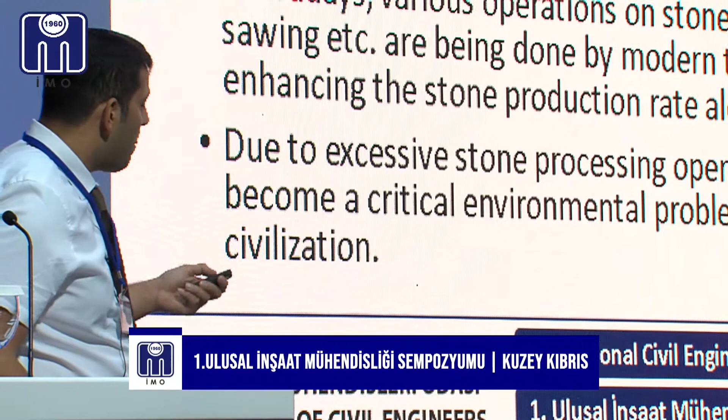As other professors mentioned, we are using too much concrete, too much cement, producing lots of stones, marble, granite, and besides that, we have lots of waste material. For example, for marble dust, out of 100% of the stone, just 50% will be gained to be used for different purposes. The rest will be applied to processing waste, polishing, quarrying, so we are not going to use this 50%.

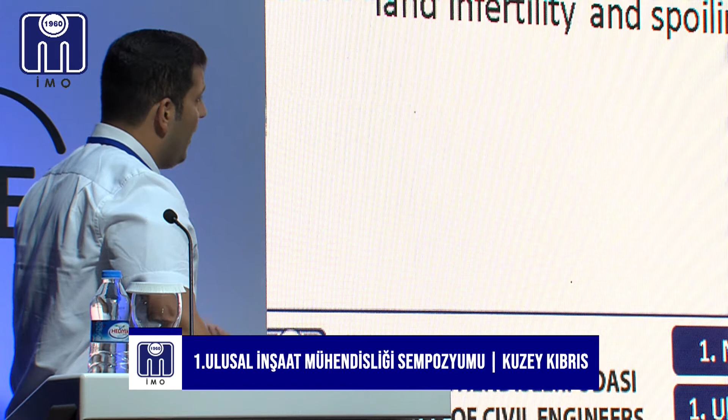So what should we do with this 50% that we are facing? Like marble dust, granite dust is also a byproduct produced during the process of cutting and grinding granite stone. According to estimates, approximately 65% of the waste is produced during different industrial processes on granite stone, so even more than marble dust, which was around 50%. Like marble dust, granite dust causes environmental problems like air pollution, land infertility, and spoiling natural beauty.

So still there is a question why we are not using these, why we could not convince the companies, the construction sector, to use these in an official way. In this island, we have lots of universities, lots of researchers, and very good articles, as Ertuğ Hoca and Şevket Hoca mentioned. So why is it not applicable? Why are the companies here still not using this material for producing concrete? This is a very big question everyone might have in their mind.

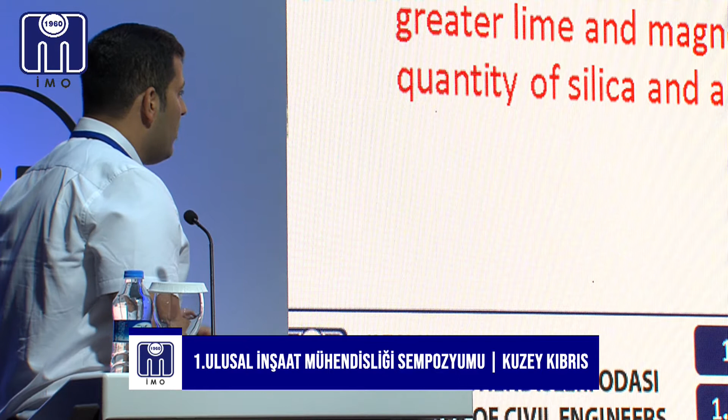There are several studies showing that marble dust has greater lime and magnesium concentration, while granite dust has a greater quantity of silica and alumina. These are the basic materials we use to accelerate or produce hydration. Based on this chemical composition, it shows these two materials might be useful in our concrete production.

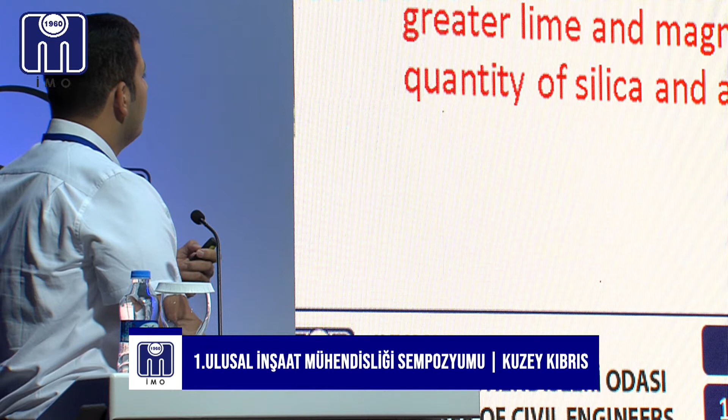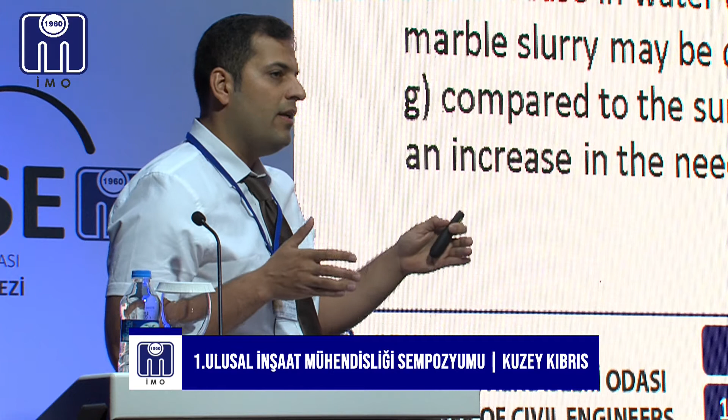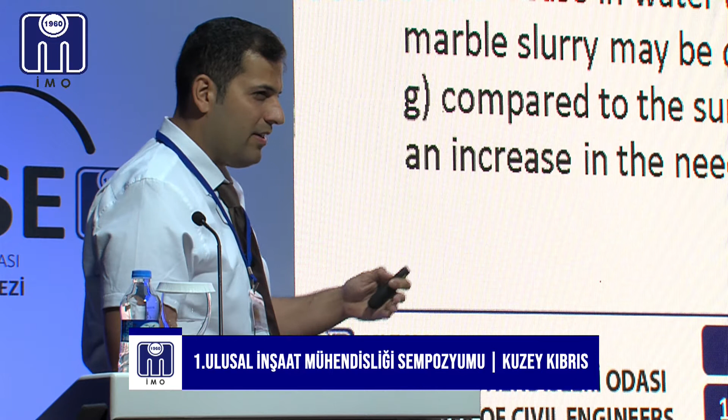The first question might be based on the workability of these two materials. Out of the 100 articles we went over, 99% mentioned that adding this material will decrease the workability of the concrete. However, there were a few articles showing that it was increasing, which might be based on some different reasons.

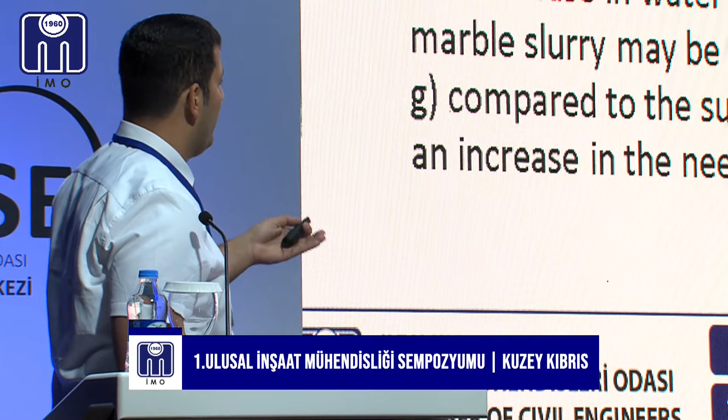By the way, when we have marble dust and granite dust smaller than 75 micrometers, this decrease will be shown more highly and in a better way. The increase in water demand of cement composites containing marble slurry may be due to higher surface area, which is almost around 0.67 meters square per gram, compared to the surface area of cement, which is 0.32 meters square per gram, which leads to an increase in the need for water.

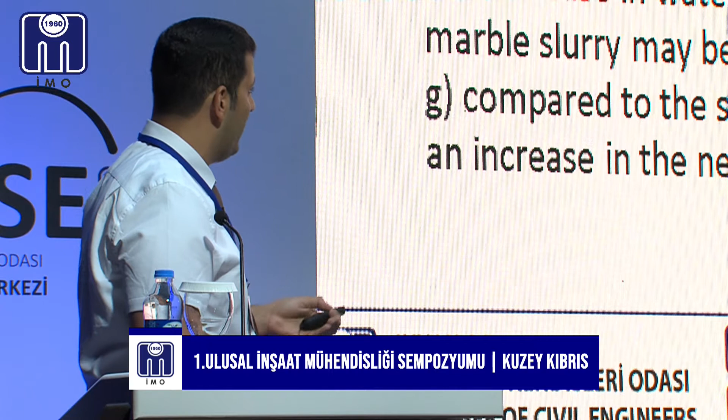One of the reasons mentioned was based on the surface area which absorbed too much water. So this is the table if I want to show you. The detail will be available in the article if you were interested.

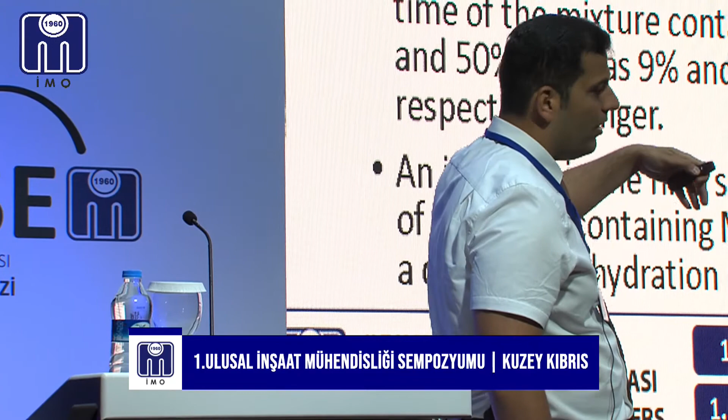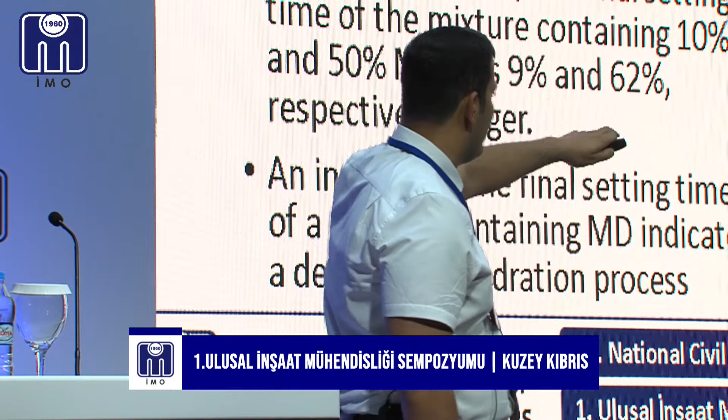Just if you see in all the articles which were collected, it shows that the workability was decreased. You could see that just in one case that I mentioned, they said it's making no change for the workability of the concrete. But in all other terms, you could see that.

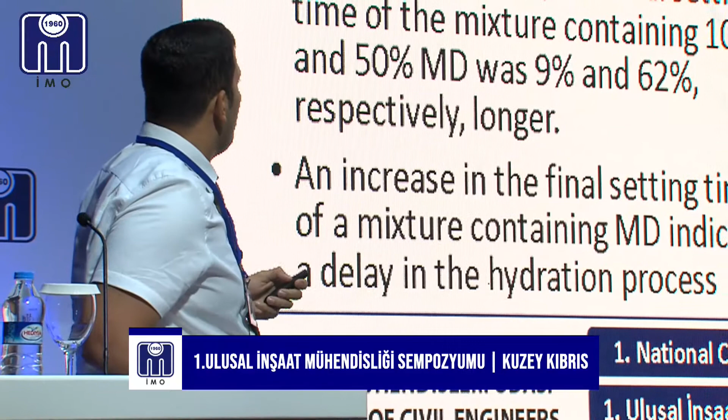Regarding the initial and the final setting time, it will actually decelerate the hydration process. It will delay somehow.

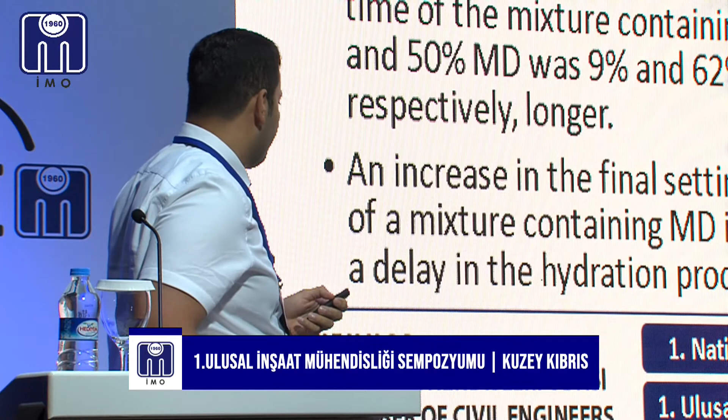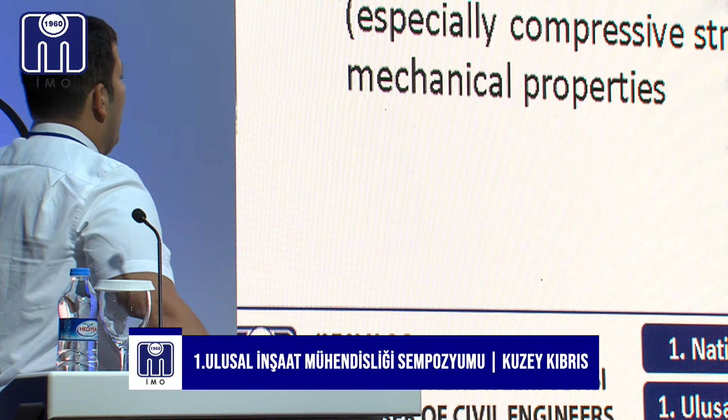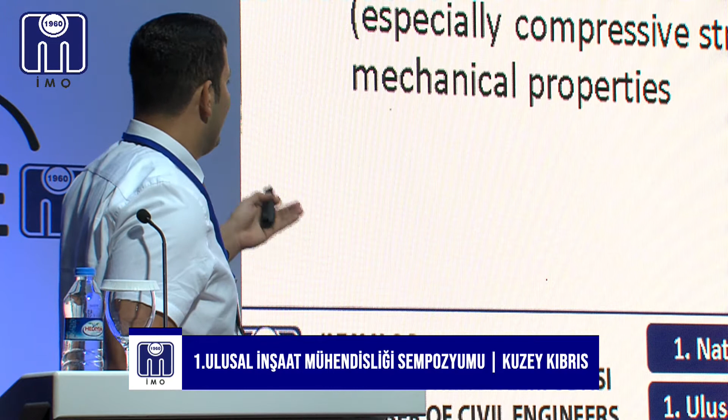Based on the mechanical properties, it's so interesting. Some articles mentioned that it will increase the mechanical property, some mentioned it will decrease, but it will be based on some reasons. For example, some researchers believe that incorporation of marble and granite dust as a cement replacement in cementitious composite decreases mechanical property, especially compressive strength, while some report an increase in mechanical property.

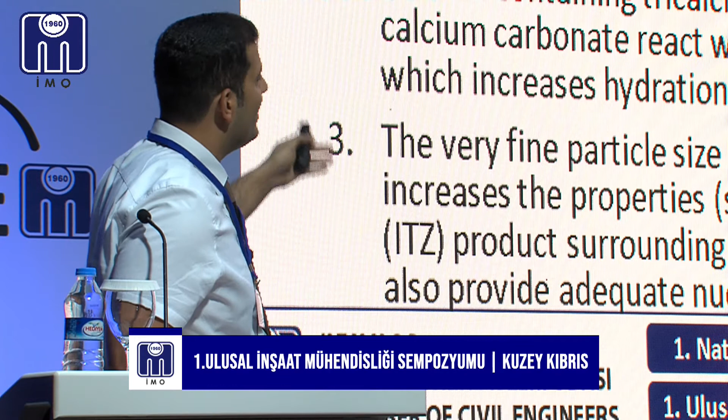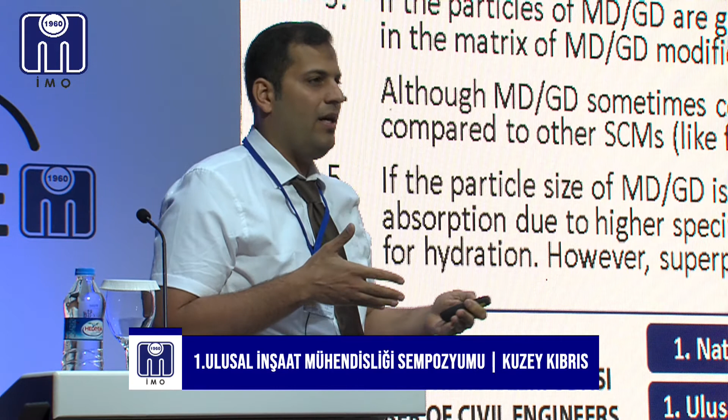I have mentioned the reasons for the decrease and also the increase, but I think it will be boring for some audiences, so I will not mention them. Just I want to tell you that these two possibilities might be there. However, the decrease of the mechanical property is not that much highlighted that we want to say we are not going to use it. Still, it will be applicable when we want to use this material.

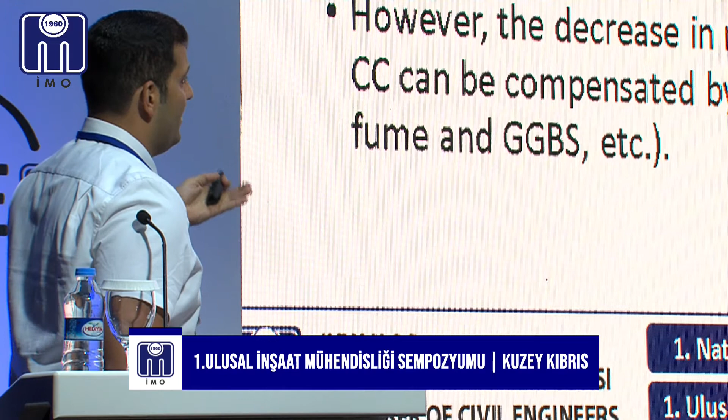In summary, for the mechanical properties, I would like to mention that the addition of marble granite dust as a cement replacement in CC can be both detrimental and effective for the mechanical properties of cementitious composition depending upon various factors. This factor will be based on the particle size of the marble granite dust, addition of other SCM which is very important, water to binder ratio, addition of superplasticizer, and the source of the marble and granite dust. Because based on the source, the chemical composition might be different, and it might affect the hydration rate of our composite.

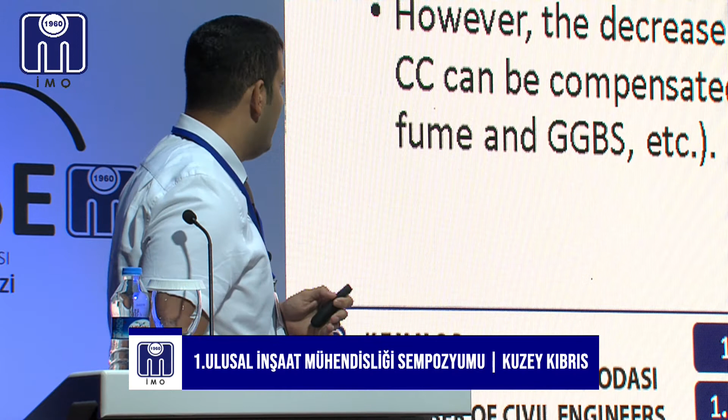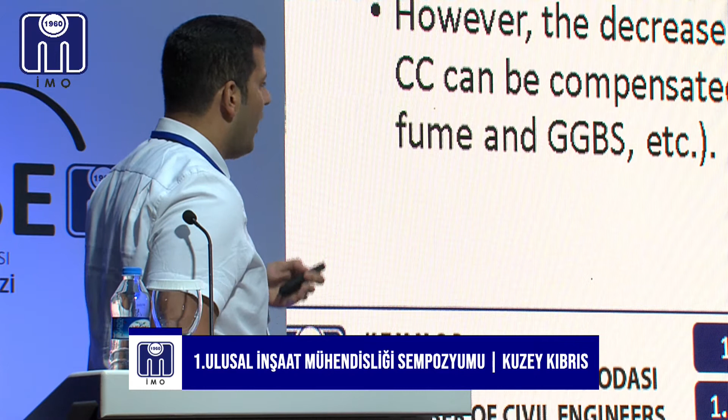However, the decrease in mechanical properties of marble dust and granite dust modified CC can be compensated by addition of other SCM like fly ash, silica fume, and GGBS. We had some articles showing that if we add fly ash and silica fume, it will mitigate this decrement of mechanical properties.

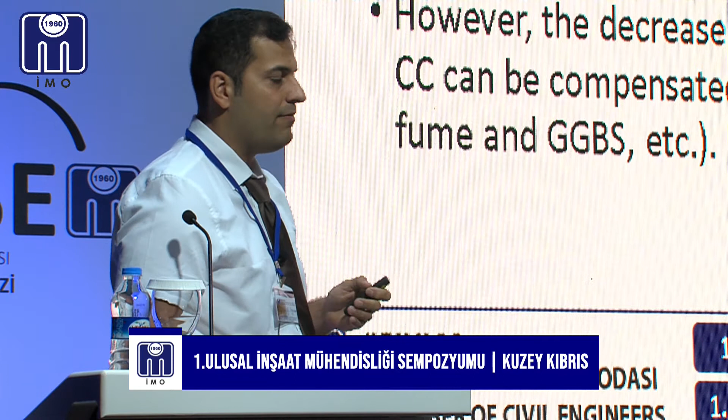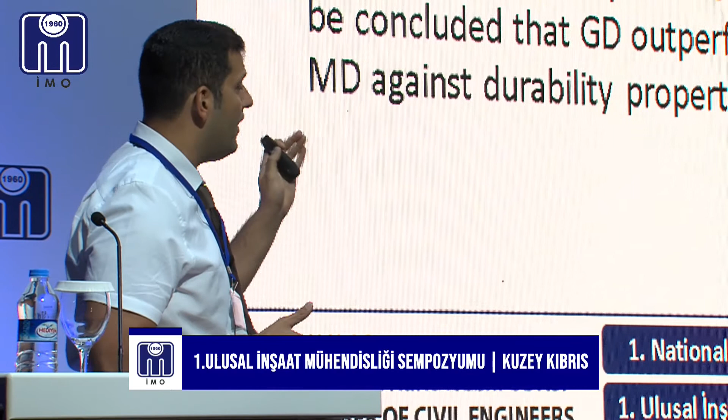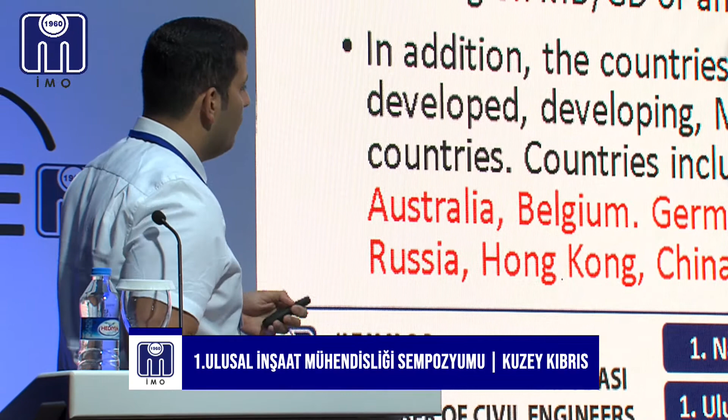But why did I mention this? We are saying that the mechanical property, the durability, the workability will be good for such a concrete or cementitious composite. So what is the sustainability assessment and what are the challenges that we are facing?

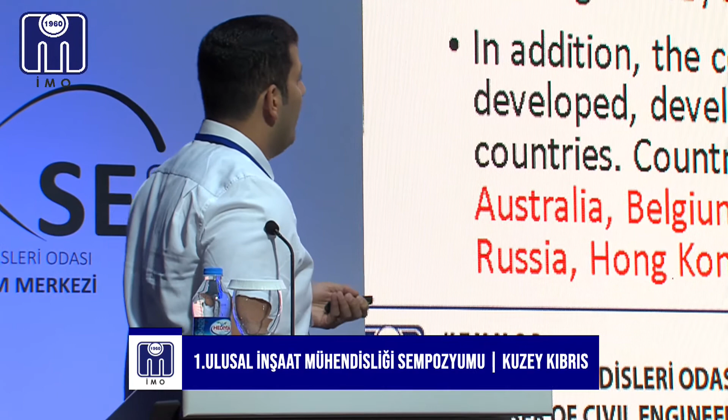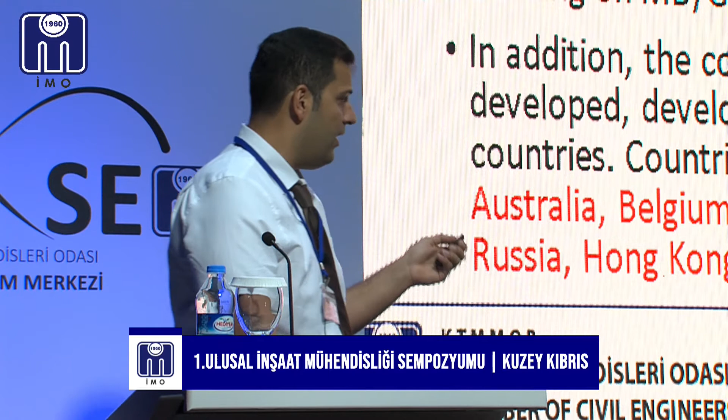In order to evaluate the capability of these two dusts as a cement replacement, we distributed a questionnaire to professors from all around the world, from United States, Australia, Belgium, Germany, France, Finland, India, Pakistan, Turkey, Russia, Hong Kong, China, Japan, Brazil, Egypt, and Iran. We were asking about what they think about the application or adding this material to the concrete.

Interestingly, since it was during the pandemic situation, we distributed 300 questionnaires and collected 100 answers. Out of 300, just 100 people replied to us. But we tried, when we wanted to distribute, to target just the people who were working, or doing research, or in construction, and were facing supplementary cementitious material.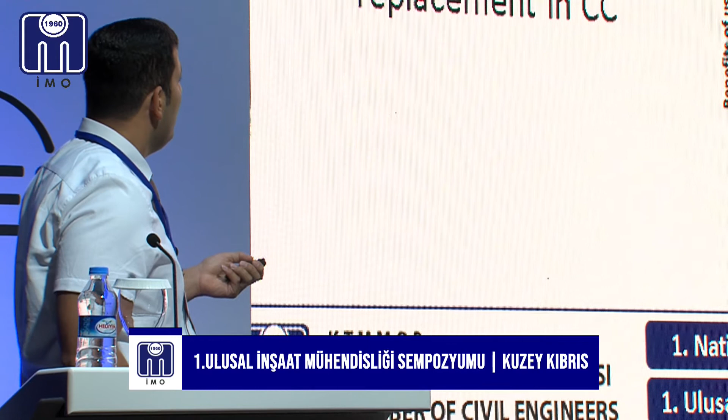So first, in terms of environmental aspect, the participating researchers were asked to identify the main benefit of incorporating marble granite dust as a cement replacement in a cementitious composite. If you see here, we put some questions, and the most important answer that we received was about the reduction in environmental degradation. It was very important for them as a basic or initial application of these two materials. So in terms of environmental aspect, we might say that it could be useful.

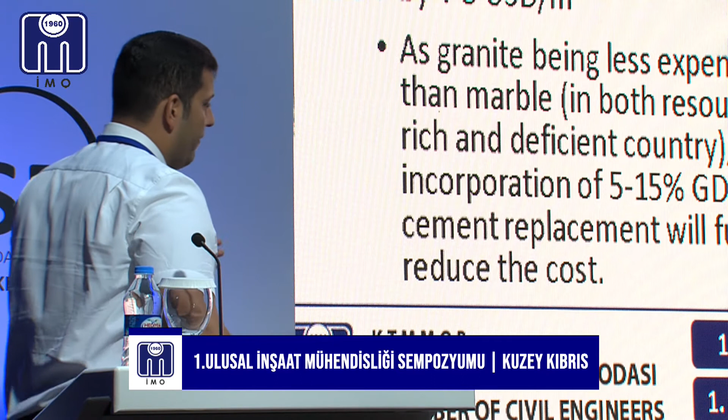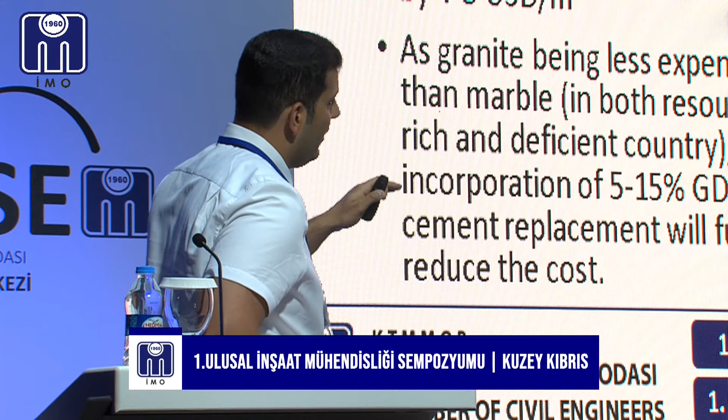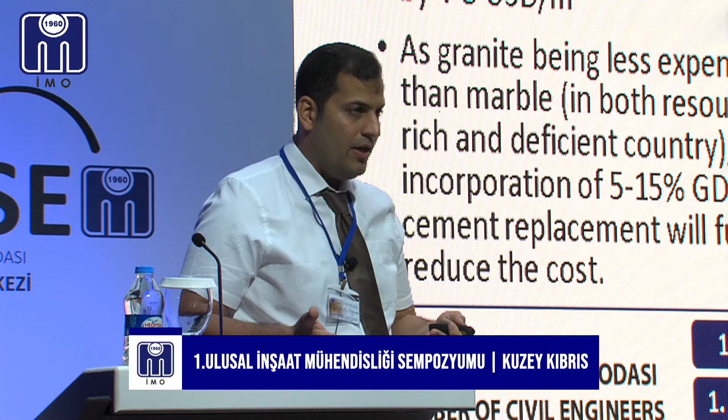Then in terms of economic aspect, we did the analysis of the cost and compressive strength of grade M30 produced by replacing cement with 0 to 60% of marble dust. The result here shows, based on the life cycle cost analysis, that by decreasing cement content it's normal because we are substituting the waste material with cement. So of course, when we could do such a thing, the cost will be decreased and we could save more money. So it was good in terms of economical aspect.

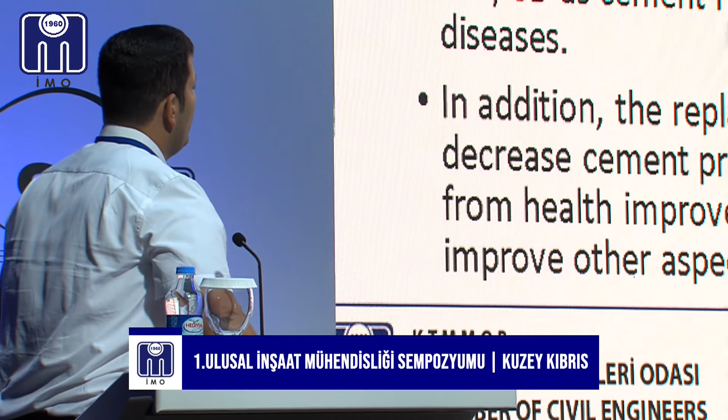In terms of social aspect, this aspect of sustainability includes various parameters related to this topic for well-being of society, health improvement, job opportunity, and a good working environment.

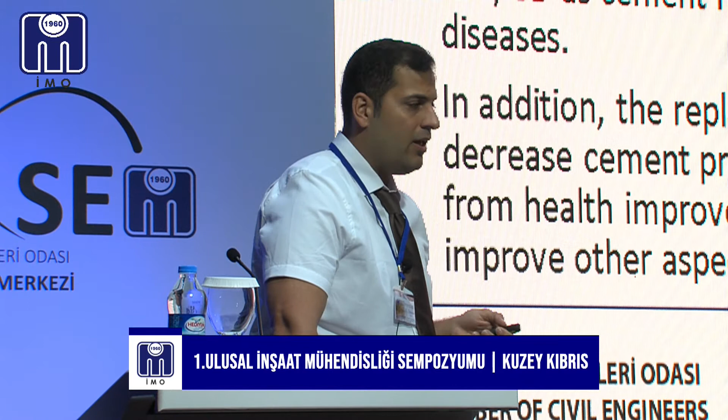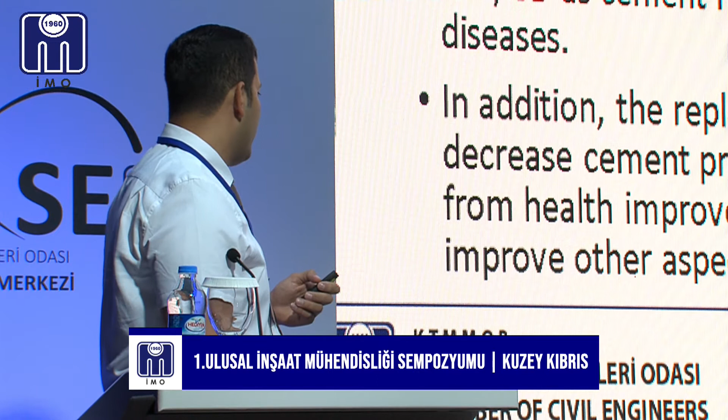Basically, the marble dust and granite dust, if we just leave them in the environment, they will not be useful. They will make problems for health, and we will find some society issues. So the replacement of cement with marble and granite dust will also decrease cement production, leading to reduced air pollution, apart from health improvement. The usability of these two can be improved for other aspects of society and the country.

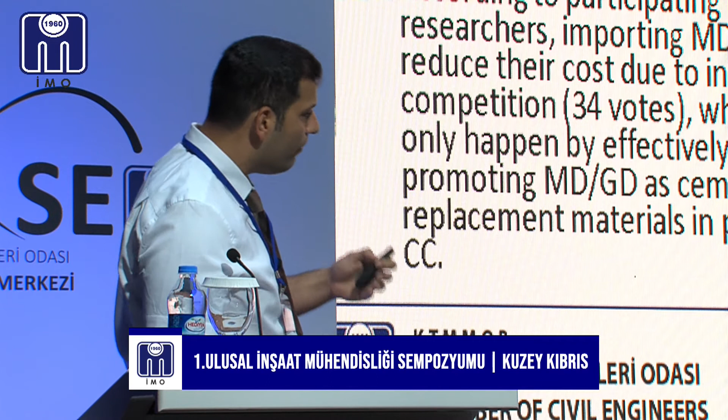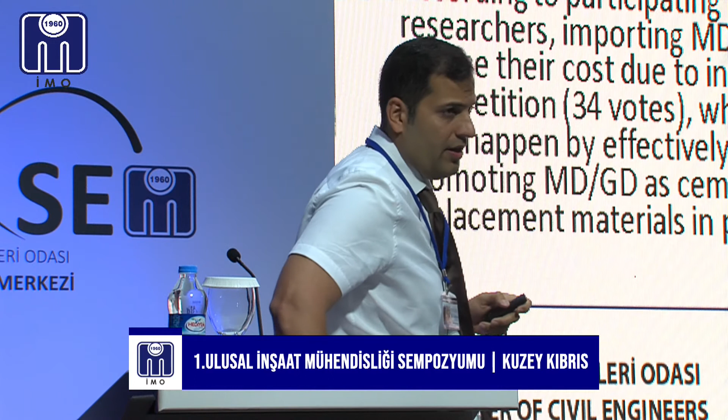So we were also asking, if we use the marble dust and granite dust, what were the researchers thinking about this. Based on the respondents, the most important one was the cost reduction of the granite dust and marble dust, and the second one was the development of local firms in terms of society aspect.

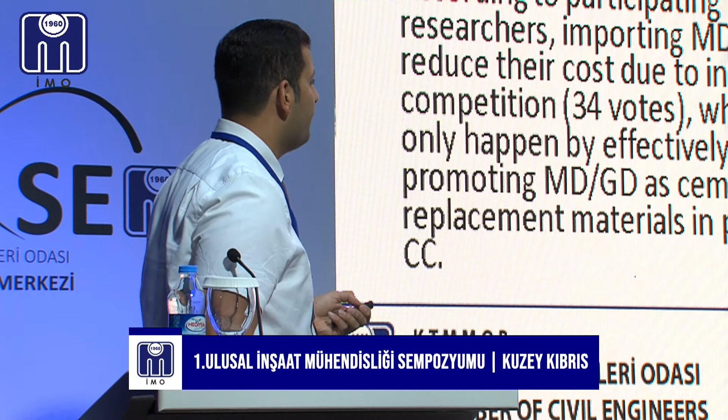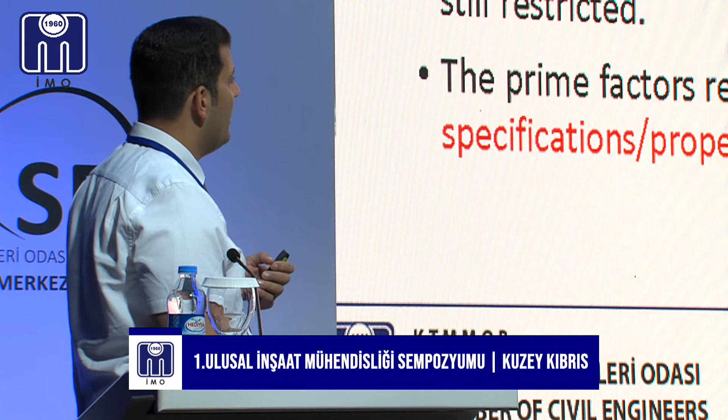So after that, we had some challenges. Despite the homogeneous laboratory research and statistical analysis data representing the potential of using these two dusts as a cement replacement, we have lots of problems which restrict us from using this type of waste material. The prime factors responsible for this restriction includes uncertain specification, properties, risk, and cost.

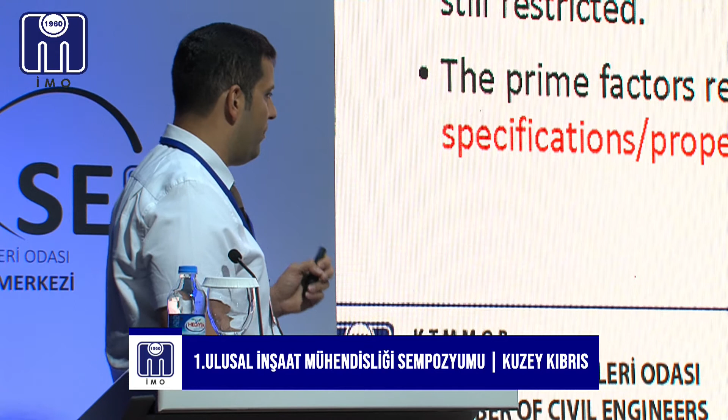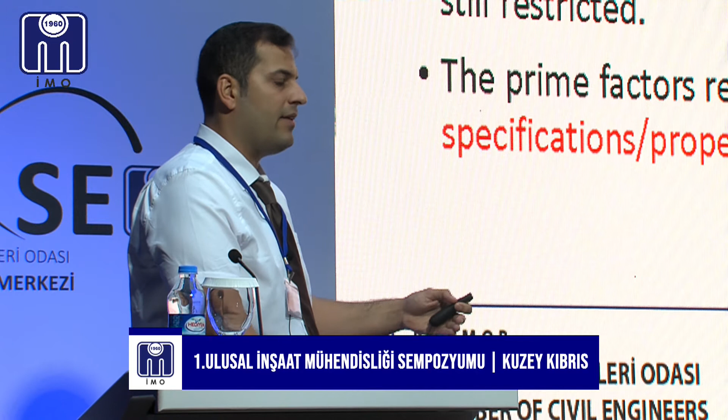So one of the reasons we could not actually convince the companies to use this is the risk that they don't really accept to go over. If there is no instruction, if there is no manual, we cannot convince them to go take this material and use it, although there are lots of researchers even on this island. So it is very difficult.

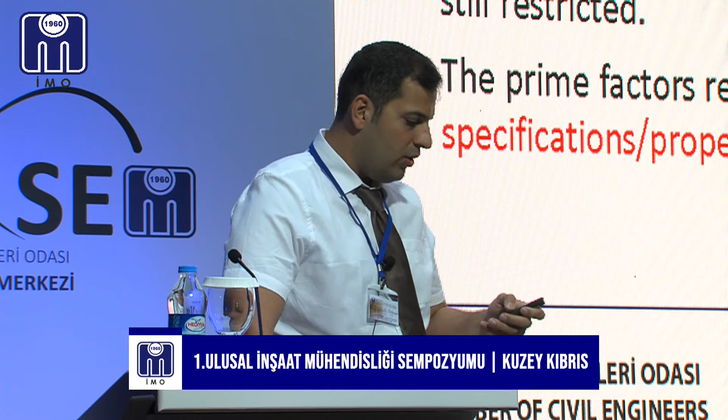So, what we are thinking - first let me finalize this part. So, Ali Hocam, can you summarize in 2 minutes please?

Okay, Hocam. So the reason that people are not using, or companies are not using, marble dust and granite dust, based on the researchers that we asked, were based on these parameters: the technological backwardness,

unavailability of design code and standard, which you could see was the most important parameter, and unavailability of marble dust and granite dust in resource-deficient countries. So in some countries there are no marble mines, no ores that they want to excavate and use - they should just import it.

Another one is stakeholder trust issues - it's very important that we could observe and convince them. And another one was the unavailability of practice examples. If one company or one university applies it in a real project and does the test and really examines it, this could draw other companies' attention to say, okay, this project was done successfully, so we could go over this and do it. So these two were very important: unavailability of design code and standard, and unavailability of practice example.

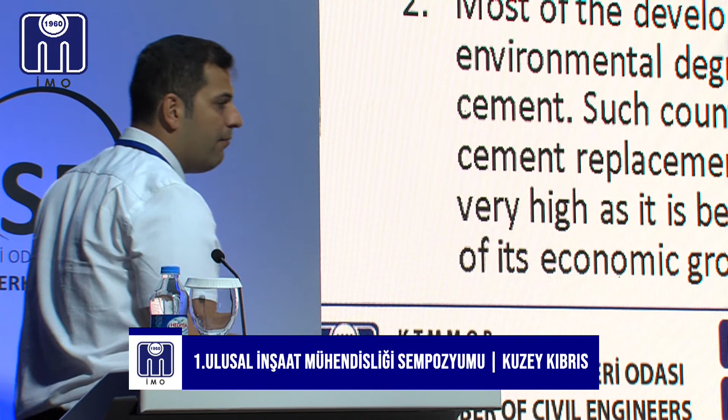Another thing on this basis was there is no specific procedure to store and handle the marble dust and granite dust. This is very important, as marble dust and granite dust are very fine and very water absorbent, especially for this island, so they can easily get moist and hardened and become unfit for cement replacement. They will get hardened, and this hardening will be very difficult - again we would need to grind it, make it fine, and apply it again. So one of the reasons might be this, especially for this island.

And another one is most developed countries do not care about environmental degradation due to production and consumption of cement. They don't care about the environmental issue - they are rich enough, they are not caring about the price. So they would rather go on the safe side and do what is already available and examined. That's why they are not making risks to go over and redo or remake some production that they don't know the outcome of.

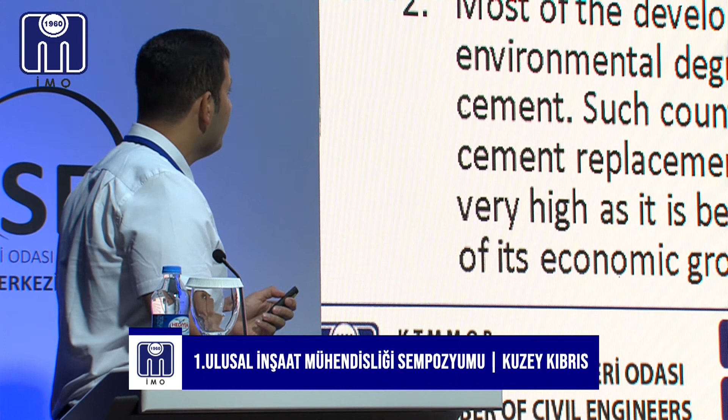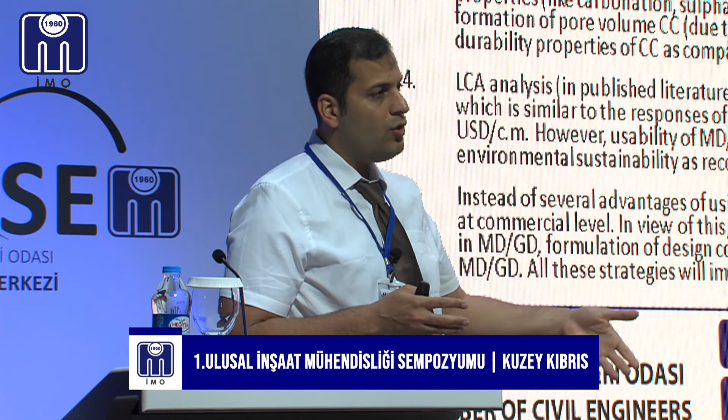And also there are some conclusions that I will not go over. I just want to remind you this article was about 75 pages, like a chapter, so if you want to go over it in more detail, you could. I just wanted to bring your attention to the reasons companies are not using such waste materials. What I'm thinking is there should be one sector, especially for this island where there is lots of research - a sector between the university and the company that could bring to the company's mind: okay, we have this research, this article, this output, so how could we apply these in our company and how could we reduce the risk. We should convince them. That's all.